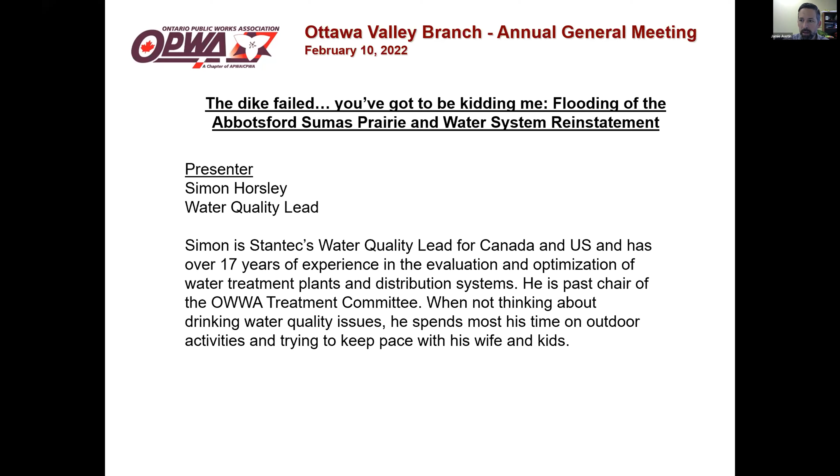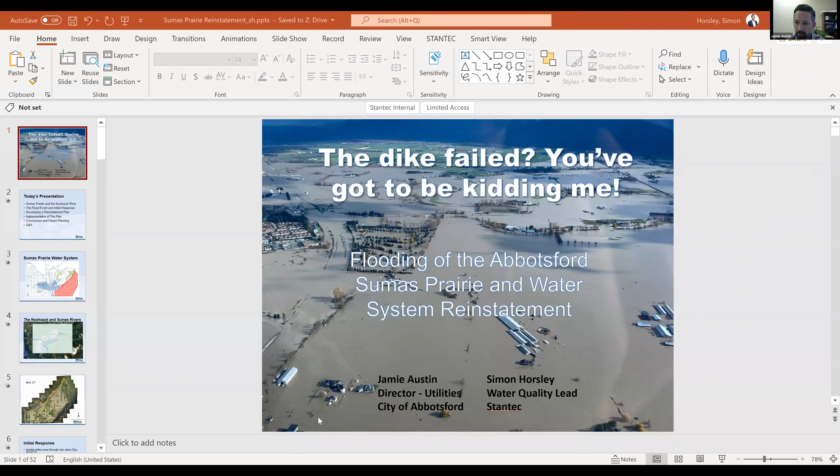Okay, thank you very much. Thanks for the introduction there. So I'm Jamie Austin, I'm here in Abbotsford. It's 9 o'clock in the morning, so I'm just finishing breakfast, and I guess you guys are thinking of lunch. With me, I've got Simon Horsley from Stantec. He and Abbotsford pretty much were partners in taking on this flood event. So we've been asked to do a presentation for you, and we're very happy to do so. So I'll just let Simon get us going here. Yeah, is that showing okay? Yeah, you just gotta punch it into presentation mode, and I think we're good to go.

Here we are. So okay, so once again, thanks for having us. We're here to talk about the flooding of the Abbotsford Sumas Prairie and how we got the water distribution system back up and running. So a little background, what you're looking at here, this is taken by me from a helicopter on the morning of November 16th, a Tuesday. Normally what you see here would be lush green farming country, and you can clearly see something's wrong with this picture. For those of you who have been out here, you can kind of make out a highway that cuts through by a barn to the far left side of the screen, starts to bend around where the word flood starts, and off it goes up to Chilliwack. That's actually Highway 1. So that gives you a bit of an idea of the extent of the flooding and the impacts it had on us out here.

So I'll get Simon to go ahead to the next slide. This is the agenda. So for the presentation, I'm going to talk about the Sumas Prairie, some of the nuances of it, and how it interacts with the Nooksack River in Washington State. Talk about the flood event and, from an operations perspective, how we initially responded to some things. Following that, this is where Simon and the gang came in. We started to come up with a reinstatement plan. The next step was to figure out how to implement that plan. And once everything was kind of back and running as normal, there's some conclusions and future planning. And then to wrap up the presentation, we will go to some question and answers.

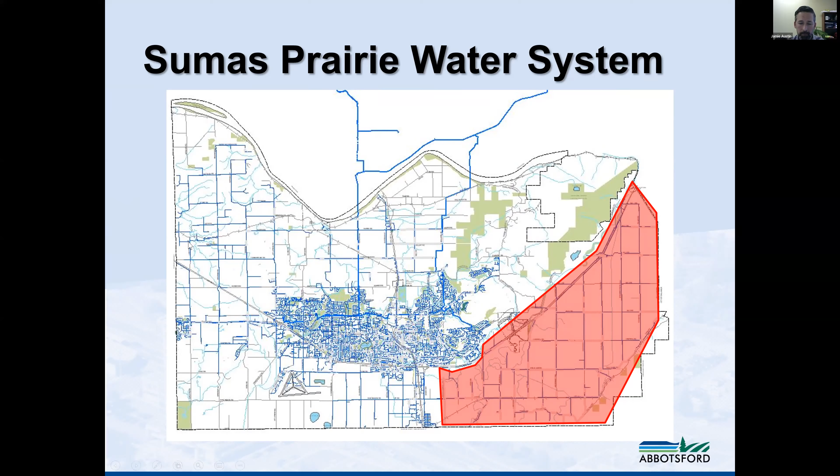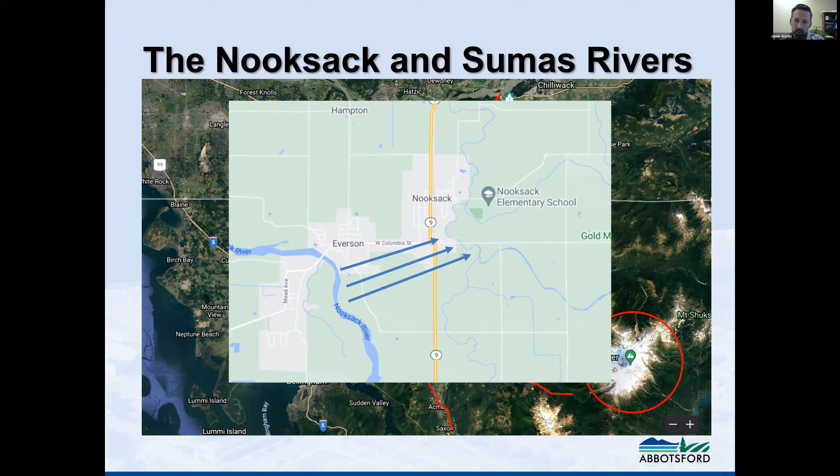I've been out in BC now from Ontario for about 4 years, and I think this thing has jumped its banks probably 3 times. So it's not that uncommon. However, the flood event that we experienced is very uncommon.

As an operation, we're always watching weather, rain. Out here, if we get a forecast of 75 millimeters, the hair on the back of our neck starts to stand up - 3 inches, that's something to be concerned about. When we saw this forecast roll in saying 100 to 150 millimeters - and typically they seem to overestimate here and back off as the event rolls in - but they were pretty firm saying it would be 100 to 150. So we knew significant water was coming.

I don't think we really figured it would be as large as it ended up being. Ultimately at Abbotsford Airport, they recorded almost 180 millimeters of rain across this event. So if you look at the bottom end, we almost doubled what was being forecasted.

So the rain started on the 13th, and by the 14th, Sunday, it had rained all Saturday and Sunday. By 5 p.m. on Sunday, we had a notice that the Nooksack River had spilled into Everson.

The following day by 5 a.m., this is what we found on the border. Looks like a lot of water. It is a lot of water.

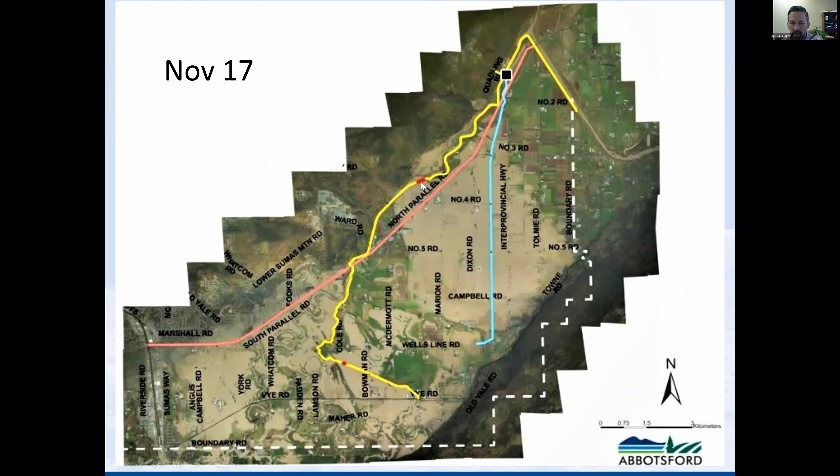So there's a couple of red dots in there. We've got a small one down at the bottom and a larger one up near the top. Those popped on the 16th, and the large one, the one to the north, basically recreated lake bottom because of that dike failure. So that gives you the background of what was going on and how things would interact with one another.

If we run on to the next slide here, from an operations perspective, what were we doing? For Sumas Prairie, that distribution system, we ensured we could have it isolated through one control valve.

So you'll see the Vye Road ACV, automatic control valve, pop up periodically through this presentation. It was the one way of telling how much water was coming in. We have a flow meter there, so if things were starting to go sideways with pressure or flow, we at least had a way to tell what was going on in the zone.

And so we were very fortunate to have one feed in, which actually had a meter on it. That certainly did help us.

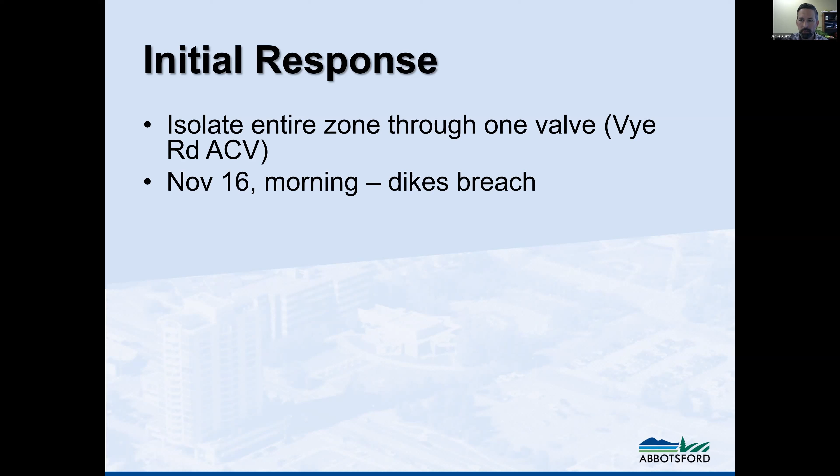So the morning of the 16th, I showed you that picture at the start, that was me in a helicopter at 9 a.m. By the time we got back down to the ground at noon, the dikes had literally breached, and that's where the title for this presentation came from. You can't sometimes fathom that things could get any worse, and then someone tells you the dikes have popped, and things did get worse.

Within a couple hours of the dikes going, by early afternoon, we noticed our two reservoirs out there in Sumas Prairie started to tank, and it didn't matter how much water we put through, those reservoirs were losing fast. So we knew we had main breaks out there and we could not maintain pressure.

By 9 p.m., we had put a notice out to the public just saying, if you're out there, you're going to lose pressure, we can't guarantee you have any water. And by this time, evacuation notices were issued to most of the prairies.

The very next day, we went out and started hunting for main breaks. We did find one, and we felt pretty good about ourselves. We had isolated a break, and we were waiting to see some recovery, to see the reservoir start to come back. Unfortunately, it didn't though, which told us there was more than one main break out there.

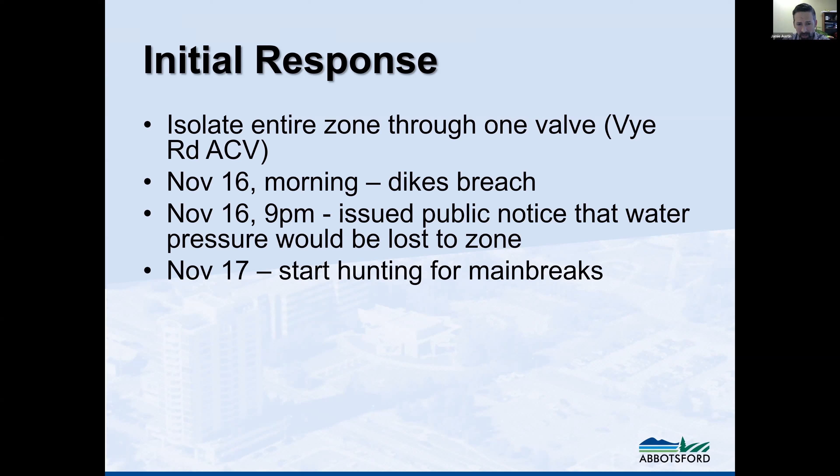That took us to the following day, November 18th. This is now the Thursday.

And we had issued a boil water advisory for the prairie. Keep in mind, an evacuation order was in place for everybody. Then within about 5-6 days, we had upped that to a do not use advisory. At this point, we knew there's too much surface water out there. Lake bottom was completely full. The lake had reinstated itself.

There were some houses with 10, 12 feet of water coming inside of them. And it was at that point we started talking, on the 17th, even once we found that the main break was not the cause of our problems. We knew we had bigger issues, and this was going to be a long-term project.

For those of you who've been involved with boil water advisories, do not use, or water advisories, typically you try to get these things wrapped up within 3 to 5 days. You isolate things, you test, you get 2 rounds, notices go out, and you're back. But we knew we had longer standing issues coming up.

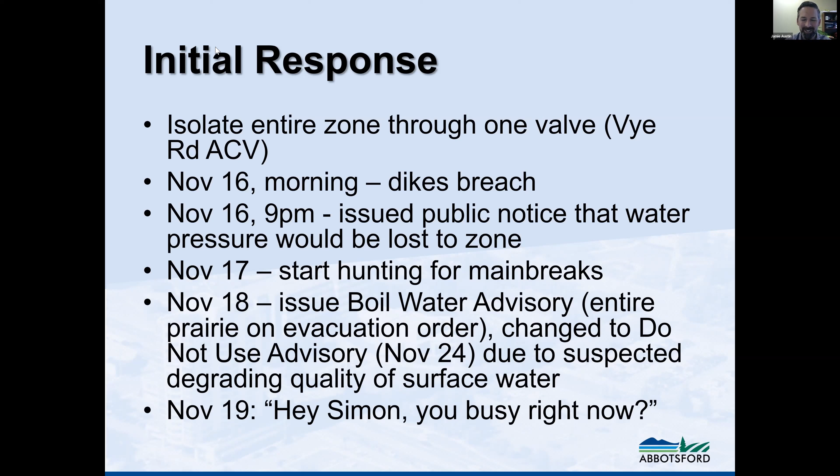Hence November 19th, had somebody hop on the phone and say, hey Simon, you're busy right now for the next little while. So, this is the cut over to Simon. He got a call on the 19th, and lo and behold, he's now working for the city of Abbotsford. So over to you, Simon.

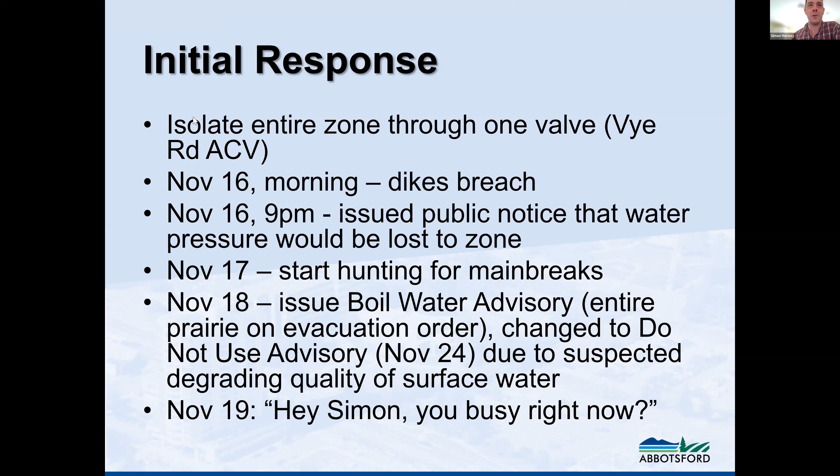Yeah, that was some phone call. So my background's all water quality related, chemistry related, that type of thing. So that's the lens that I started to look at this thing, an entire pressure zone under 12 feet of water, and what's been going on with that distribution system.

Before I came to Canada, I worked with Scottish Water. I worked in operational response there, and we had things like petroleum contamination of a system. We had a sampler roll a van into our impounding reservoir. We had bloodworms. We had all kinds of stuff that I'd dealt with. I'd never dealt with anything like this. This was a whole zone depressurized.

And so when we started chatting with the city, with Jamie and his team, what's out there? And it's okay, there's a lot of agriculture out there. So we start thinking, okay, we've got slurry and manure storage out there, and all of the kind of biological concerns that might go with that in the event of ingress. And we might have, these are remote locations, diesel for backup generators or for primary generators on these facilities. Could we be looking at diesel fractions, petroleum fractions?

We knew through conversations with Jamie that they were losing a lot of water. So we were pretty sure we had some substantial main breaks, not the usual more minor sort of spring a leak type breaks, but real breaks in the mains. And so we were certainly contemplating potential for ingress and trying to think through all of the potential contaminants.

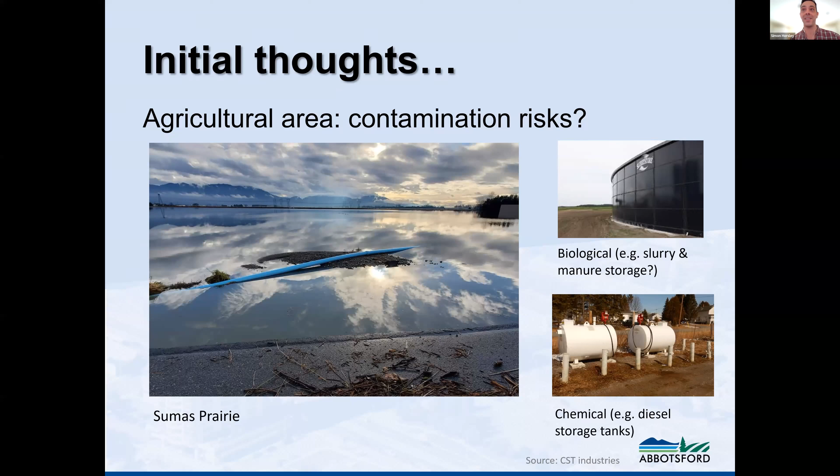Which was everything out there. So we had to take all of the thoughts and actions that we could undertake, and we had to boil this down to a practical, step-by-step sort of stage-gated plan where we could navigate our way back to bringing the system back online.

A big part of the project in general was there was nobody that had all the answers here. The city didn't have all the answers. I didn't have all the answers. We went out to industry and said, we need some experts on various different aspects here to come in and help us out. So you'll see throughout, this was a very collaborative approach. All of us pulled on our networks, and I think it's fair to say that everybody got just tremendous support wherever we looked for that support. So I'll try and name drop when I can the support that we benefited from.

In general, this is what the plan looks like, and then we're going to walk through the various stages in a little more detail. But step one was just to get pressure back. Jamie's crews were still trying to understand the scale of the breaks. We'll take a look at a couple of images in a moment.

But they knew, as Jamie mentioned, this is one pressure zone with one point of entry that has a flow meter. So we know how much water normally goes to that zone. And therefore we knew that the amount of flow that was going in now and failing to fill the reservoirs meant we were losing a lot of water out there. So we had some fairly substantial breaks. So restoring system pressure was number one. We can't do anything without that. Number two, with the system having gone, if we're able to isolate these breaks, what does that network look like?

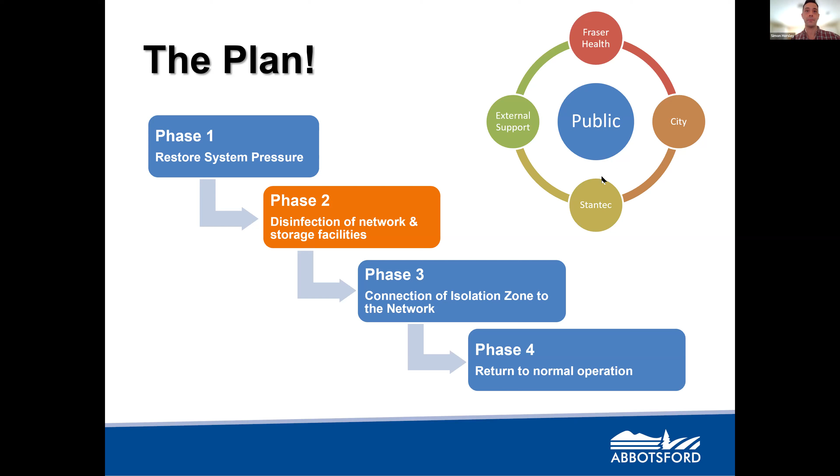They're trying to keep this system pressurized, so hopefully the ingress stays out, but we never like pressure to be below about 20 PSI, just for the purposes of maintaining pressure and keeping stuff out. And of course, we had compromised pressure all over the place.

Phase one was the most essential first step - Jamie and his crews, painfully, by a process of elimination, turning valves, monitoring pressure, going around. We were able to reach out to the local community of leak detection specialists, and some of them were able to help. They had guys out in boats, people everywhere trying to figure out where these leaks were.

Eventually we managed to figure out the majority, as it happens, were within one focused area. They were able to ring fence it, but even then, a lot of other leaks had to be found.

We knew we would know when the number of leaks was coming under control, because those tanks would start to fill. We're pumping water in via that valve, and the idea is that valve is supposed to fill those tanks. If it can't fill it, it's just because we're leaking so much water. So when that comes under control, those tanks would start to fill. That was our indicator.

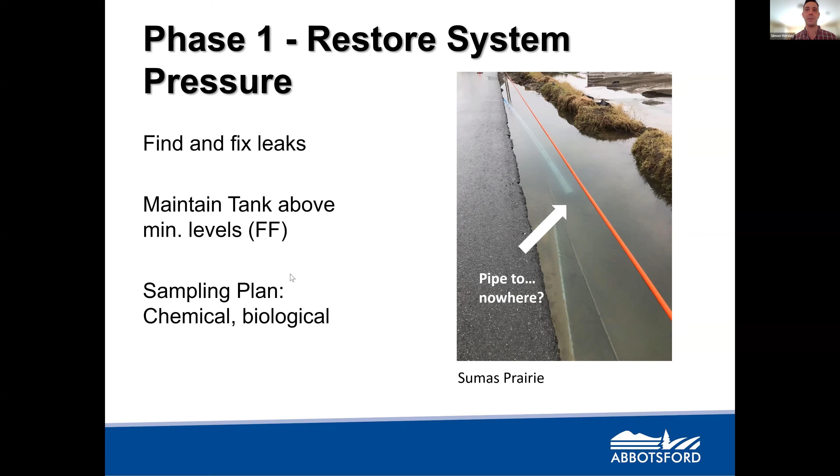I want to talk about disinfecting this network. This was an interesting challenge. We didn't know, having brought the system back under pressurization, what's been introduced to the system, and what kind of volumes and pockets of water are in there that we don't want. So here's the things we had to think about.

This is a chloraminated system. As most of you will know, we keep our drinking water disinfected either by adding a little bit of residual disinfectant, either free chlorine or chloramine. Chloramine has some benefits, but it's a fairly weak disinfectant. It's a decent sentinel to let us know if we see total chlorines dip - with a chloraminated system, that says we've got some issue we need to look at, so it does well there.

It's good for long-term managing biofilm, it's good for various things, but it's a poor primary disinfectant. In other words, if there's an ingress event of something that needs inactivated, chloramine's not very good at that. Chlorine is. So as we got talking about it, we thought, what do we want to achieve here? Number one, we want to affect a complete displacement of all the volume in that system - everything that's in there, we want it out, we want to start fresh. Number two, we want those pipe walls to experience a stronger disinfectant, like chlorine.

So we had to flip this system, which right now all we have is this Vye valve that brings all this chloraminated water in. We got to flip this over to chlorine. And how do you go about doing that?

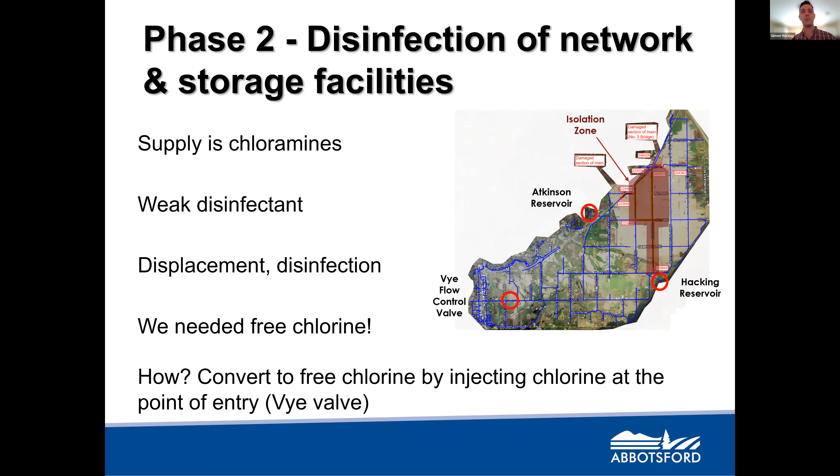I've converted various systems back and forth for different reasons over the years. So we've done this before, but I don't think ever in quite such a hurry. The way you convert chloramines to free chlorine is by adding lots of chlorine, but there's a bit of nuance to that.

So it's a very brief one slide, Bill Nye the Science Guy moment. If I was to go to the city today, city of Abbotsford, pour a glass of water, or indeed Ottawa, and pour a glass of water, I'd have a glass full of chloramines, that disinfectant. If I want to convert that glass to chlorine, I basically have to take a dropper of liquid chlorine bleach and dropper it in. But what does not happen is we just nicely convert.

What happens is, for various funny chemistry known as breakpoint chemistry, it goes through this strange cycle where the chlorine goes up, still chloramines, and the whole thing collapses to almost no disinfectant residual at all, as all of the ammonia gets oxidized to nitrogen gas in this kind of quick moment. And then we reestablish chlorine.

So any monitoring within 20, 30 minutes where you're adding the chlorine, your chlorine levels can be up, they can be down, it's a big mess. So you have to figure all of this out, and understand where that monitoring plan has to focus. Otherwise, you might feel like you're getting junk data - I'm adding chlorine and my chlorine levels are going down, and now they're going up, and what's going on.

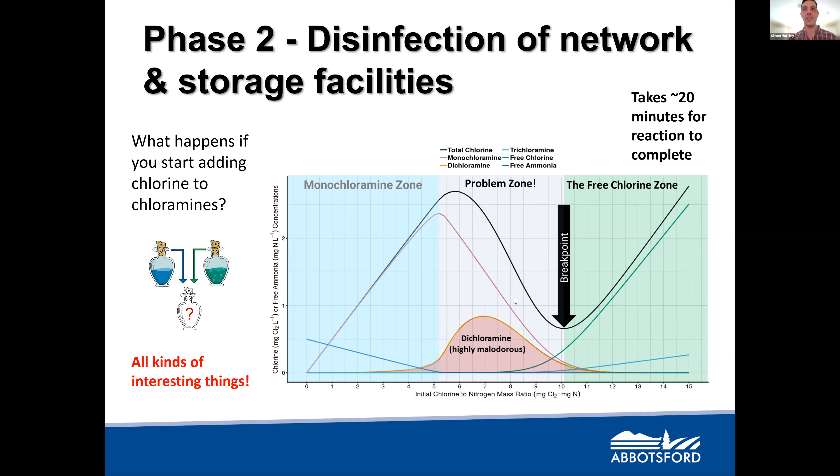So there was a bunch of, let's get the old spreadsheets out and figure it all out. That's the easy part. That's the stuff that everything works in Excel.

The actual practice was Jamie managed to get support from a local chemical supplier, calling around and saying, who can help us here? And we were able to get the support of a local trailer mounted, good-to-go chlorine skid with metering pumps, and we were able to get an on-site hypochlorite storage and start pumping.

So Jamie's guys - this is all very quick, all of this is happening on the fly. They managed to get down into that valve chamber, figure out how they could actually get the chlorine into that chamber, get these chlorine metering pumps on site, and start dosing the chlorine, and hope that chlorine skid doesn't get washed away in another storm, which we were all kind of keeping an eye on the forecast for, because this was very much still in the thick of it.

To their credit, they managed to get everything up and running really well. It was a great collaborative effort.

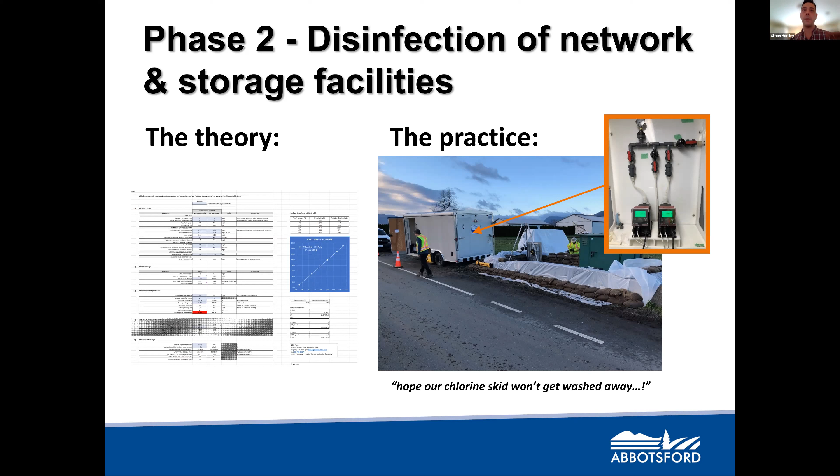So what does it look like if you take a whole system full of chloramines and you want to convert it to chlorine? I'm going to show you through the magic of stop motion animation here. I remember as a kid, I really liked these old Ray Harryhausen movies where he'd move the models a little bit at a time to create a sort of impression of movement. So we're going to do the same thing here.

We're going to take a series of - there was a hydraulic model the city has, and they had a hydraulic modeler consultant on hand, GeoAdvice, who do really good work. They were able to take that model, and we worked together and figured out, let's use the model to help us predict, once we start adding chlorine, how long is this whole thing going to convert?

And we're doing two things again with this conversion. Number one, we're converting it to free chlorine so the disinfection is better.

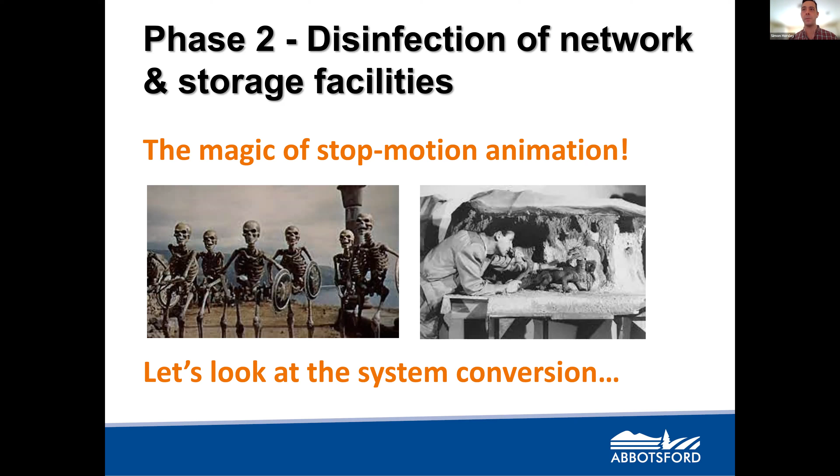We're also affecting a complete displacement of the volume. The free chlorine is like a tracer. The chloramines don't measure free chlorine, so if you go out in a chloramine system, you can't measure free chlorine - only when you're over to free chlorine disinfectant. So wherever the free chlorine shows up, you've gotten rid of the chloramines from the hydrants we're flushing. We're converting to disinfectant and displacing everything. So we start off with a system full of red here, as it were.

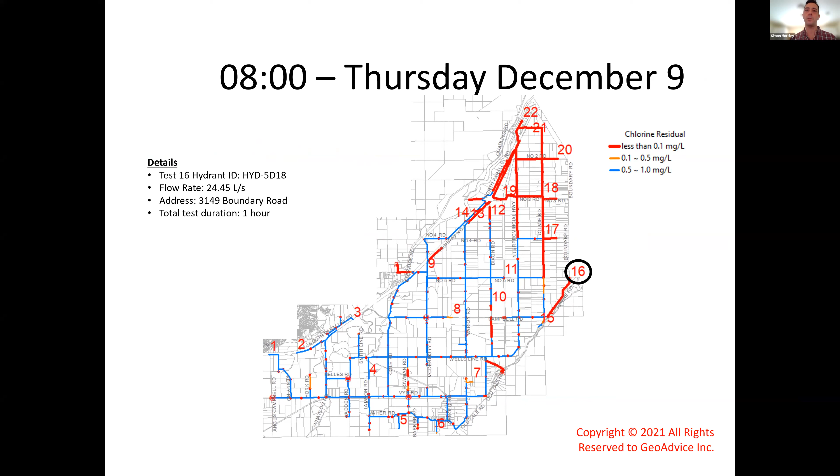This is the plan, hour by hour, where the hydrants are being flushed. This is where the hydraulic models get really handy - where do you need to flush, how long do you need to flush, at what flow rates, etc. Jamie's crew were able to go out and follow this plan. The timing is not always perfect with the hydraulic model - it depends on the conditions on the day, but it gives you the right sequence of activities to go through.

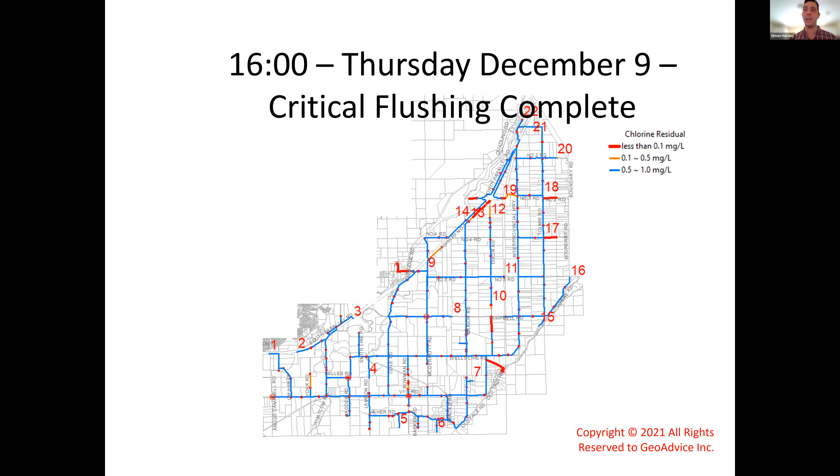The guys were able to do this complete conversion. By measuring free chlorine everywhere, we knew we've gotten rid of all of the water that was in that system. Everything in there has come through that valve - it's new water.

So it took about 3 days for the crews to work through and do all of that hydrant flushing and get things converted. Having converted it, we wanted to keep it on free chlorine for a while. That's so that, even though we've displaced all the water, who knows whether there's any slight residual contamination, biological contamination in there. Let's give the chlorine some time to do its work - chlorine disinfection needs reaction time. The longer you give it, the more it's going to disinfect anything that's there.

As a kind of belt and braces, just to try and be conservative, they opted to keep that free chlorine in the system for about a week. We're able to do this kind of thing because we're under evacuation orders, and we could do things like keep the network disinfected for a week because no one's really using that water right now.

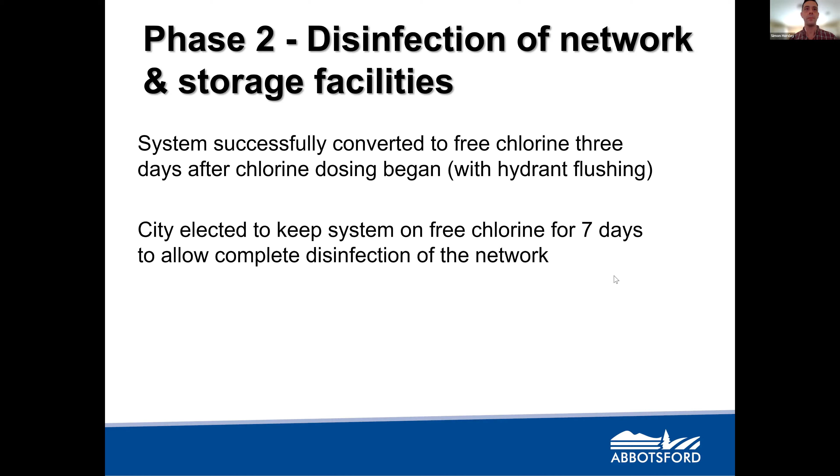So one final thing before I hand things back to Jamie - the third and penultimate phase was to bring this ring-fenced area of water mains. Now we've got everything to free chlorine. Jamie's guys are still out there this whole time, fixing mains and bringing them on. Well, how do we bring these mains on? There's nice procedures to tell us how to do this, right?

So there's AWWA C651. As we're looking at this, the teams of people who come up with these procedures go out to industry and find case studies, and they try to figure out how to mitigate all the different risks based on what's out there. All of the information you'll find in these procedures is backed up by case studies, and you can find that stuff published - these are all the case studies that were used.

We asked ourselves, these case studies used to develop these protocols - were they accounting for this kind of catastrophic event, or are we falling outside, an outlier here in terms of the level of risk and contamination? Can we adopt these wholesale, or do we have to go back to the drawing board and make sure this is the right thing? Or do we have to take any extra effort? We say, how can we know this? You'd have to be an expert specifically in these protocols.

We knew that here in Ontario, the ministry in 2020 just completed their disinfection water main procedure, and that was Aziz Ahmed, who's the manager there, who had led that task force. So I called up Aziz and said, listen, we're working with the city of Abbotsford right now in BC, and we've got this question - do you have an opinion on that?

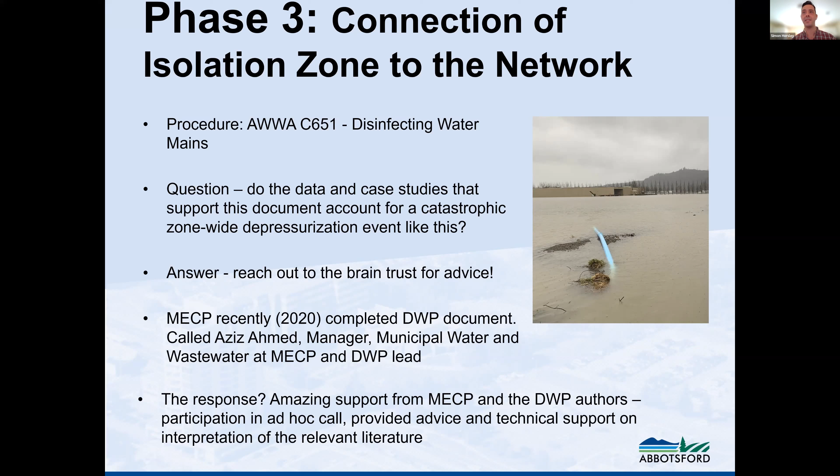Yep, so return to normal operation. All the work that was done in the system, the conversion to free chlorine, unidirectional flushing going on, main break repairs, all sorts of things going on at once, but that's all fine and dandy. But in order to get out of a boil water advisory or a do not use advisory, you have to have

actual test results to show that what you did was effective. So developing our sampling plan, we didn't know what we should be targeting. Remember this event started, we lost pressure on November 16th, and we're about 2 weeks in, started December. We've got our minds wrapped around a sampling plan. We knew Christmas was coming, and although people were on evacuation orders, there was talk of people starting to be allowed back in phases into the prairies. Ultimately, by that last week before Christmas, everybody was off evacuation orders. That doesn't mean they could get back into their houses, but a lot of people were able to, and we wanted to ensure they actually had water coming out of their taps that they could use to at least start the cleanup process.

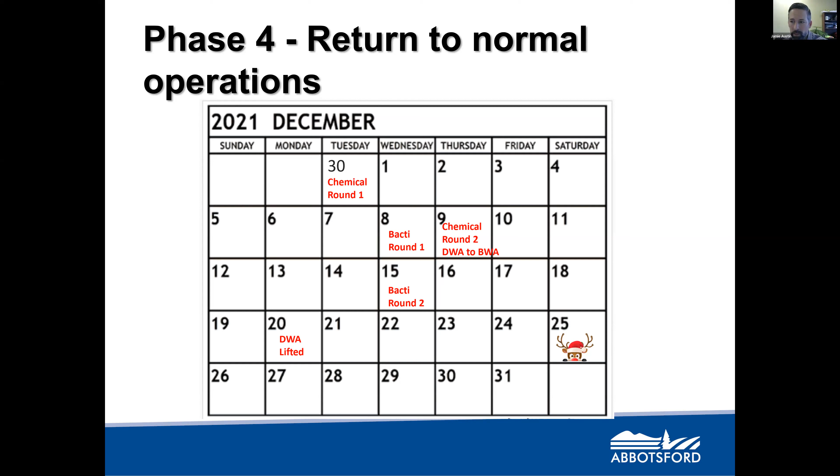We still have some outstanding issues. Those pictures Simon showed you of water mains laying in farmers' fields - those ones have actually had to be replaced. We've got about 1.1 kilometers of water mains that were fully exposed to everything floating around in the prairies out there. So an unexpected capital job of 1,100 meters to replace pipe out there.

That leads us into some conclusions and future planning. Time and circumstance were on our side - we had lots of time to deal with this, primarily because there wasn't a lot of pressure on us from a water operations perspective. I also have drainage and dikes under my authority here, so the dikes failing and all that, that's going on on the other side of my desk.

But operations and the focus everywhere was really on the dikes. We just had to try to get the water distribution system up and running at the same time that people were going into their houses. So we were fortunate that we had the time to sit down and find people to help us right across the country.

The reinstatement plan, as Simon mentioned, nothing - we couldn't really find something to address what we were dealing with. So now this will definitely be used in the future as a go-to plan that we can unbolt and implement when needed.

I mentioned probably 8,000 years ago is when the Nooksack started dumping into the Sumas River, once the glaciers backed out here, and it'll probably go on until the next ice age happens. So there's a chance we will have to implement this plan again. Also, having the Fraser River to the north, every time we go through the spring freshet, there's dikes on that side too, and concerns that we can have flooding on the other farming prairies. So we see use for this in the future.

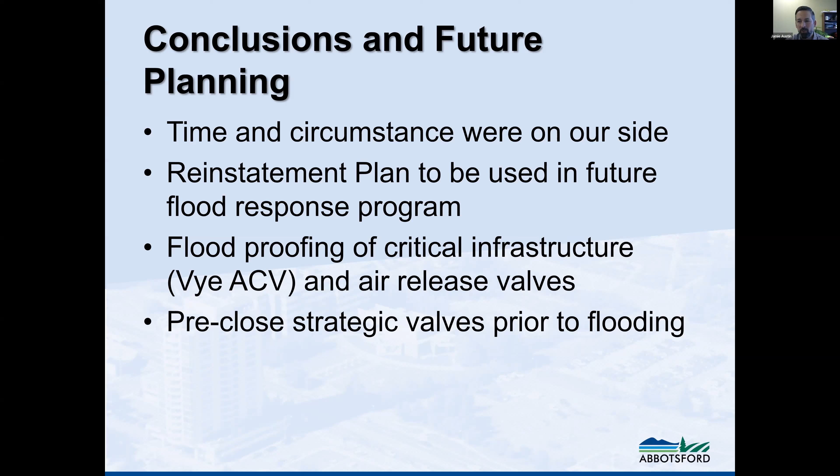There was cabbage floating around everywhere and it plugged up the jet boat's motor. We certainly tried. If we had some of these valves strategically closed ahead of time, it definitely would have been helpful, and we would have been able to isolate those main breaks earlier and get the system back up and running. So that pretty much wraps everything up.